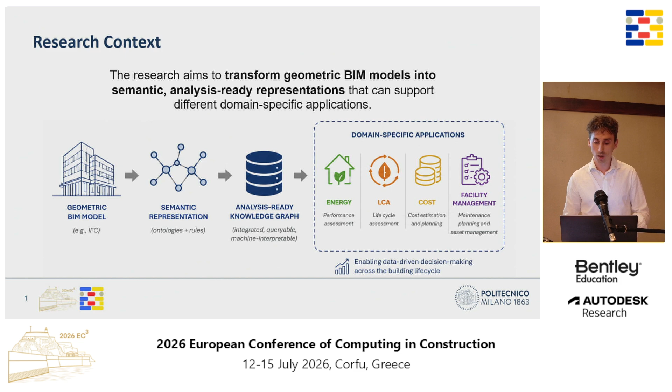And specifically for this paper, we address one specific challenge regarding the semantic integration between independent BIM models created during renovation projects. Renovation projects are typically characterized by multiple BIM models representing different project phases, such as the existing condition and the proposed retrofit intervention.

And since these models are often developed independently and stored in separate IFC files, they do not contain explicit semantic relationships between the corresponding building elements. As a consequence, performance-related information is fragmented, making automated analysis such as energy assessment much more difficult and often requiring manual model merging or adjustment.

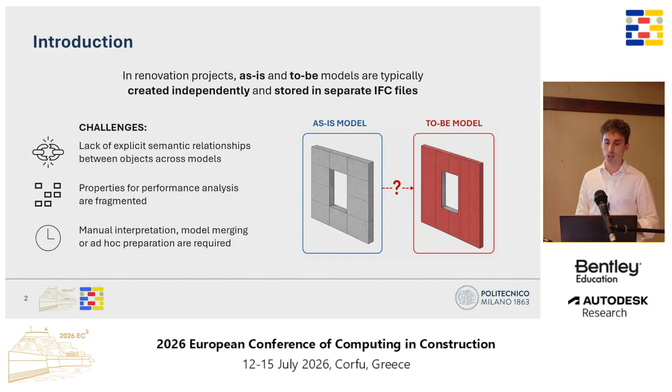Existing approaches generally assume that semantic relationships are already available or can be directly derived from a single BIM model, but this assumption does not hold in renovation projects where the models remain completely independent. Our research therefore investigates three research questions: how can adjacency relations between independent BIM models be inferred from surface-level geometric evidence, how can such relations be semantically created without model merging, and how can the resulting semantic model support performance-oriented data extraction in renovation scenarios.

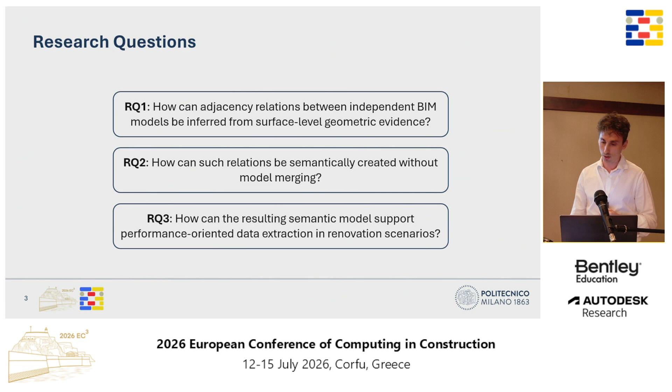To address these questions, we propose a geometry-driven and ontology-based workflow. As you can see here, we start from the input data, that is our independent IFC models. Then in parallel, we have a first part where we analyze the geometry of the independent models to detect physically meaningful contacts between the objects. Then both IFC models are translated into RDF reusing existing ontologies, the Building Topology Ontology and the Building Element Ontology. And finally, the detected adjacencies are transformed into explicit semantic relations, enabling cross-model reasoning and automatic extraction of analysis-ready information.

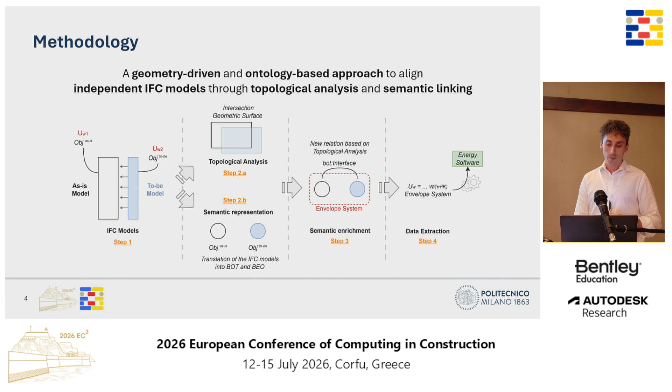So the core part of the methodology is the geometry-driven topological analysis. Rather than simply detecting nearby objects, the goal is to identify the physically meaningful contact interfaces between elements belonging to independent BIM models. Two surfaces are considered adjacent only if three geometric conditions are simultaneously satisfied: if they are coplanar, if they have opposite orientation, and if they present sufficient overlap. Together, these conditions prevent false positives by excluding surfaces that are only geometrically close but do not represent a real physical contact.

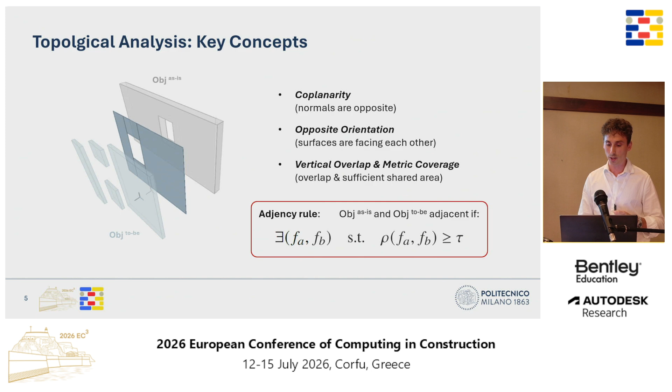Once these conditions are satisfied, an overlap metric is computed to quantify the significance of the detected interface. And this is something that we can do automatically with a specific algorithm. Then in parallel, both IFC models are independently translated into RDF reusing the BOT and BEO ontologies. Rather than merging these models, we create semantic bridges between them, and each detected interface becomes a bot:Interface instance, connecting the corresponding elements of the two different knowledge graphs. This interface makes the connection between the elements explicit while also preserving the models' independence from each other.

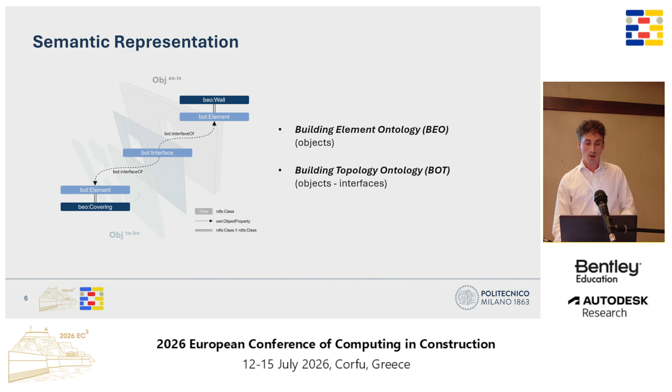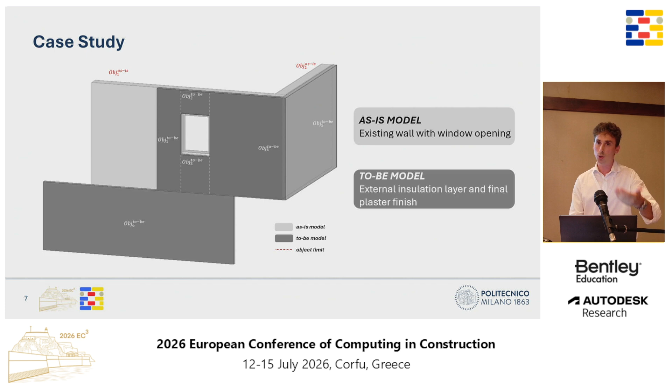In this way, purely geometric evidence becomes machine-interpretable semantic knowledge that can later be queried and exploited in more detail. The case study and validation of this proposed methodology use a really simplified renovation scenario. The existing model represents an existing wall composed of multiple layers with a window. The retrofit model contains only the newly added insulation system. This is a really simple case study, but it was designed as a simplified yet representative scenario because it reflects a common building envelope renovation scenario that we also have in the case study of our project.

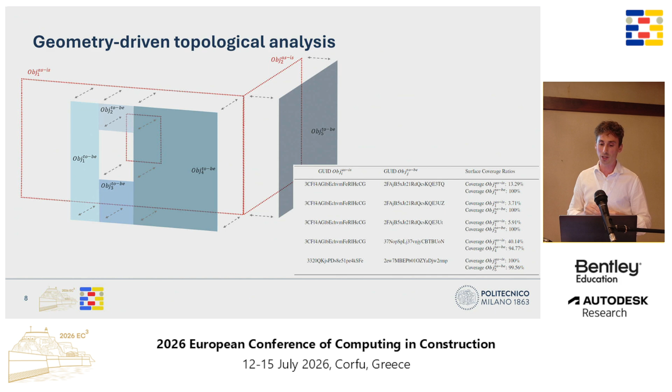The geometry-driven analysis successfully detects all the relevant adjacencies automatically. In particular, one existing wall, as you can see on the left, matched correctly with four separate insulation panels surrounding the window opening, and all detected interfaces achieved an overlap ratio higher than 94%. The missing percentage is probably due to some misalignment between the models.

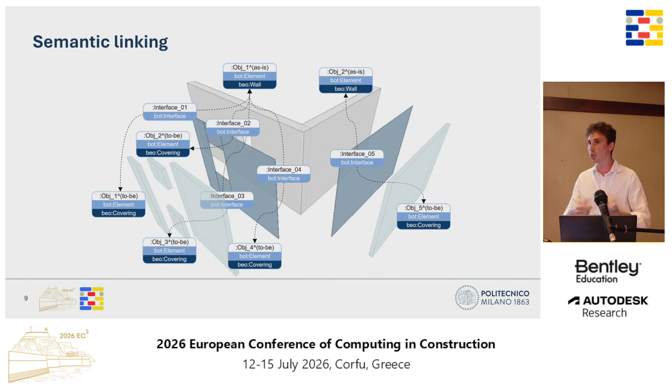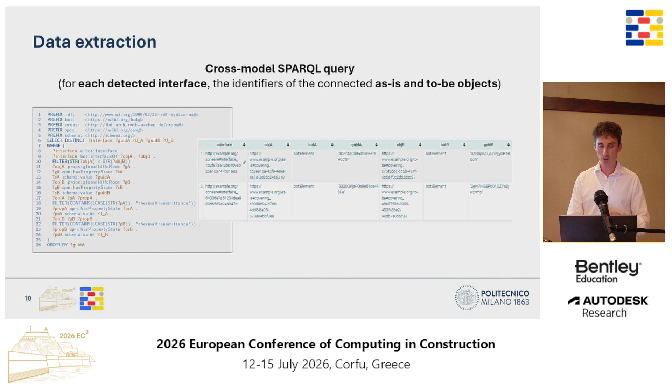Once the geometric matching is completed, the detected interfaces are automatically converted into semantic relations, and each interface is represented as a bot:Interface instance. This creates an explicit semantic bridge between the two original independent IFC models, allowing object-to-object relationships to be queried and reasoned upon without modifying the original IFC models. Once semantic links are available, we can query the knowledge graph and extract all the information we need, in this case thermal transmittance or any other information for the existing and retrofit elements that are now connected in systems, such as a building envelope.

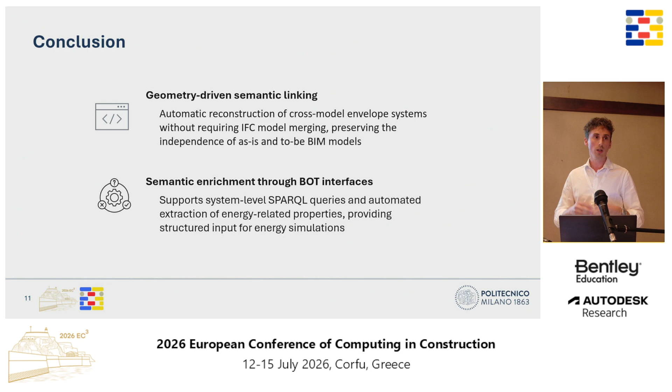So to conclude, we presented a geometry-driven and ontology-based methodology for semantically integrating independent BIM models. The proposed workflow reconstructs envelope systems without merging the original IFC files, without any manual intervention, and also enables machine-interpretable relationships between the existing and retrofit elements. And we also create a temporal model regarding this specific condition.

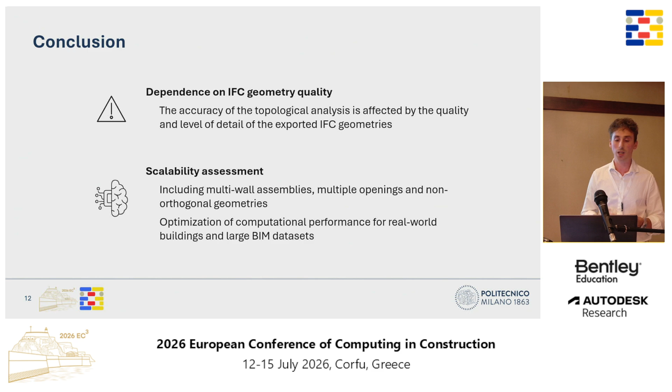Although the results are promising, some limitations remain. The quality of the analysis strongly depends on the quality of the input data, the original IFC geometry. Moreover, the current validation has been performed only on a simplified case study. For this reason, future work will focus on larger and more complex renovation scenarios, as well as on evaluating computational performance and scalability for real-world buildings.